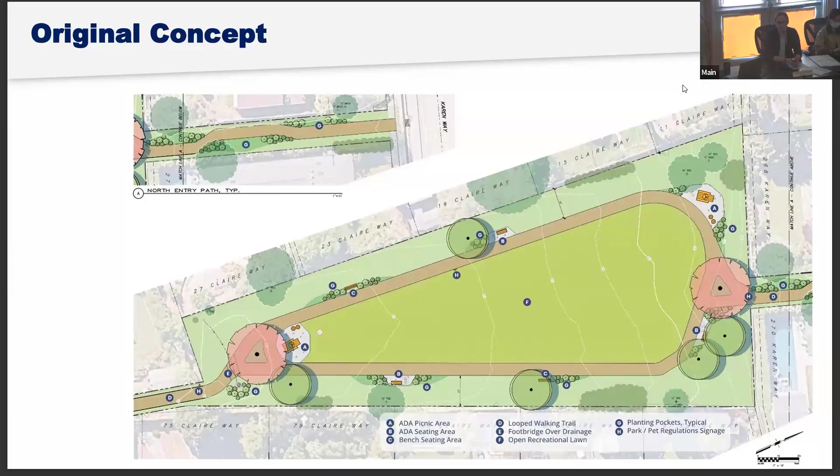The original concept.

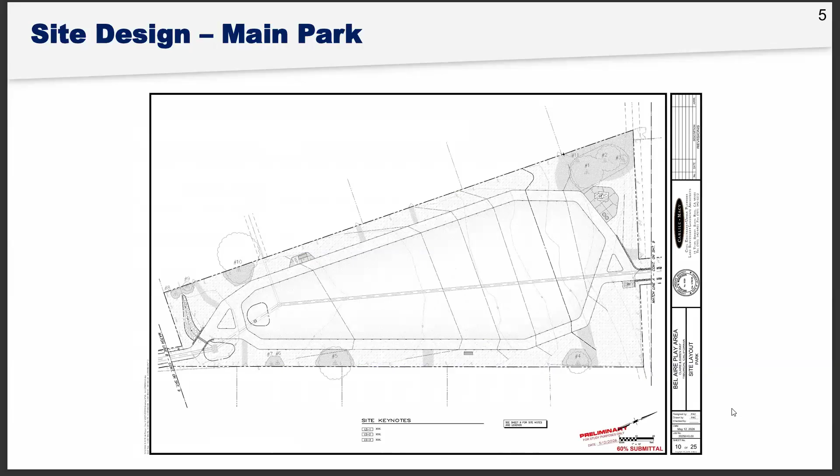Details of these are included in the construction documents. We are trying to make an accessible path, so to get grade down from Karen Way, we do have to drop the pathway in those easements, and it will require some small landscape boulder retaining walls, which is what we're currently proposing.

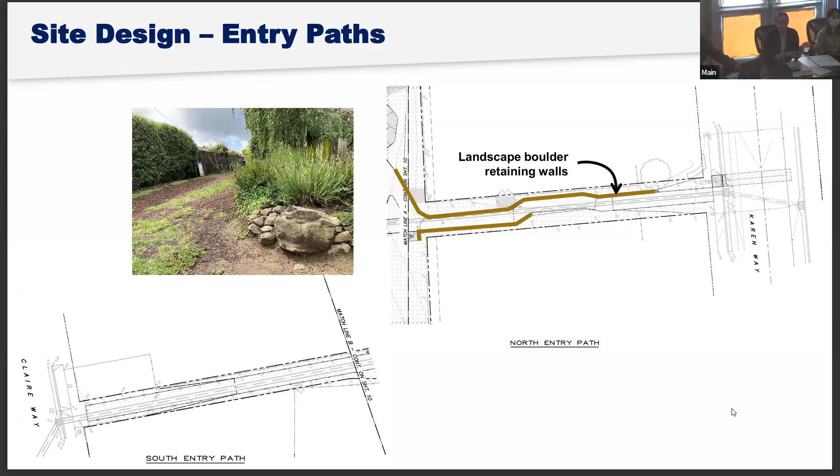This is a picture of the neighbor's property right here. So the goal is to do something very similar to help retain grade and get that pathway into the park, making this integrated with the existing neighborhood.

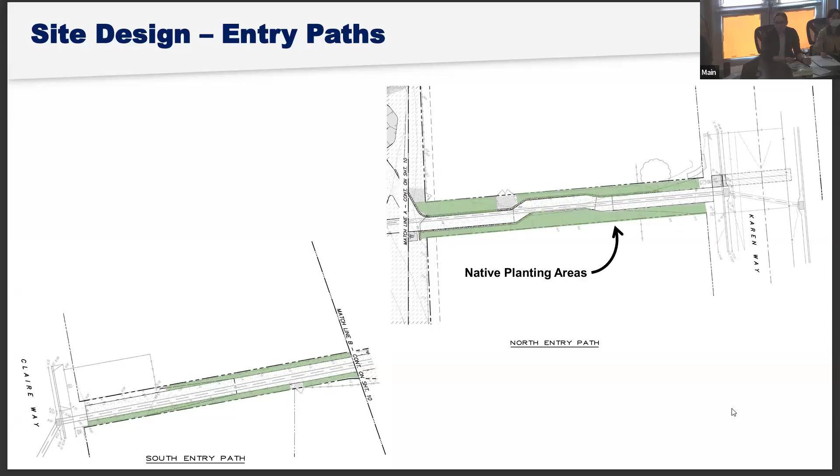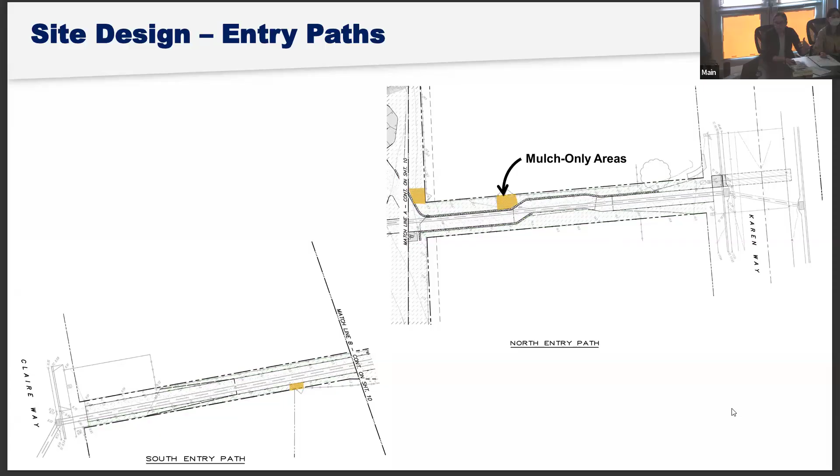There will be native planting areas on each side of the path, probably very simple since there's not a lot of space. We are proposing keeping access through all of the gates that the neighbors have along the fences, and just making those areas mulched so the neighbors can still open those gates and access the open space as they currently do.

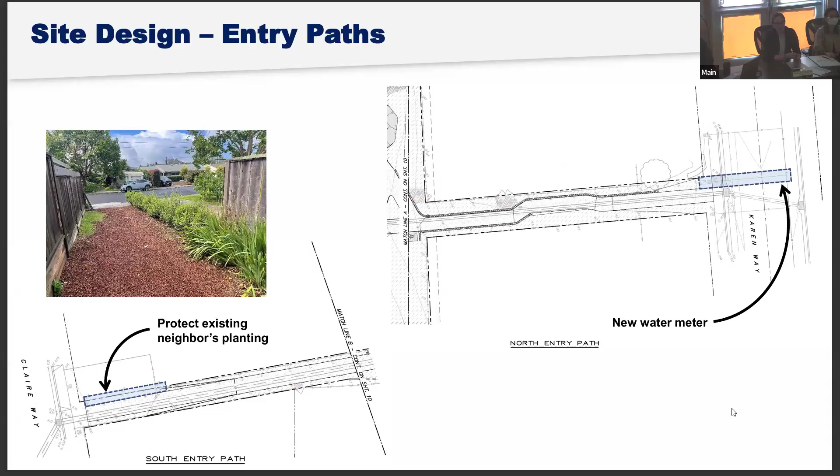We will need to put in a new water meter off of Karen Way so that we can get irrigation and water for a drinking fountain into the site. And then the neighbor on the Claire Way end has some existing vegetation that we want to make sure we can protect, or replace if it gets damaged during construction.

There we go. Within the main park, the main feature is the natural surface tenth-of-a-mile loop pathway. It includes access from the Karen Way sidewalk and the Claire Way sidewalk.

Again, we're talking about a natural surface. I'll have some examples of surfacing options here in a second. These pictures show that we had originally proposed a 15-foot planting buffer, but several neighbors said that buffer was too big and was taking away from the open space.

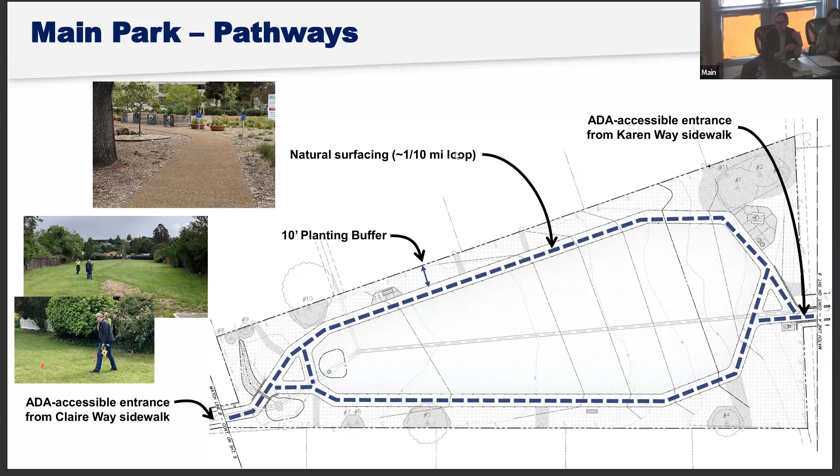So we did a site visit and flagged what a 6-foot path would look like if it was 15 feet away or 10 feet away. These pink flags are the 15-foot and the orange flags are the 10-foot. We agreed that a smaller 10-foot buffer actually created a lot more space, especially on this end, and it did not take away from providing just enough clearance to the neighbors' fences so it didn't feel like people were right on their fence.

So when it comes to pathway materials, we are hoping to get some feedback. We did hear people do not want concrete. One of the considerations we want to think about for the paving is that it needs to maintain accessibility, trying to find something that achieves that natural surface look but is also accessible, and doesn't create a huge maintenance concern for the town.

These are some of the options we're looking at. Porous pave is like a blended rubber with a binding material. It creates an entirely permeable surface; water literally flows right through it. It's durable and looks very similar to DG. Organic Lock DG is just one version of decomposed granite that incorporates a binder to make it a little bit harder, but it does require annual maintenance.

It can get moss that grows on it and make it slippery, but it is a very common material that I'm sure most people are familiar with. Infield blend is something used at baseball fields, but also on tracks like for elementary schools. It requires maintenance, but it's a more natural surface that can be compacted and made accessible as long as it's maintained.

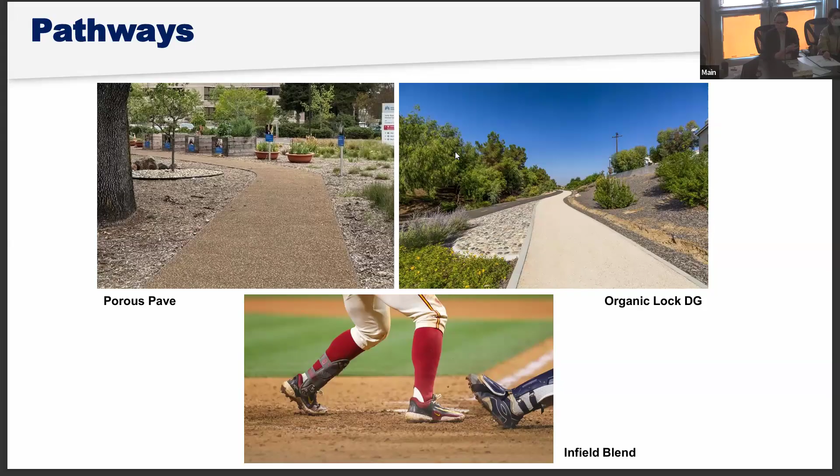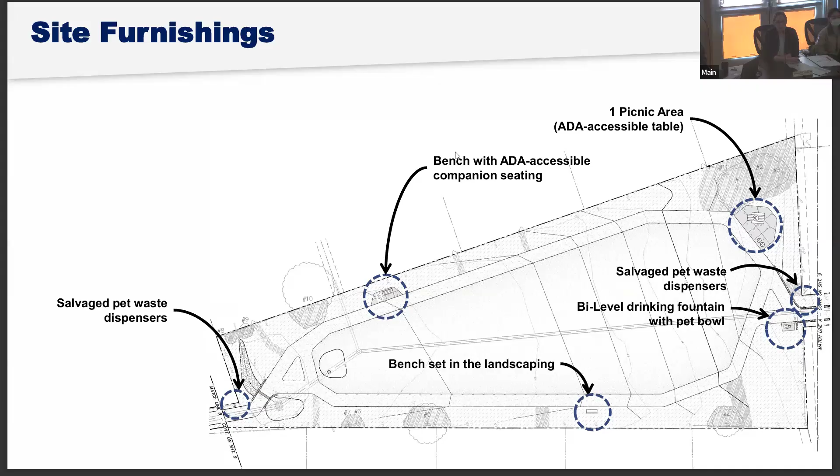The plan also includes site furnishings. As I mentioned before, we reduced the picnic tables down to one location. This is located where a neighbor already has a table and chairs. We have two benches: one is set on a pad that allows for wheelchair companion seating, and one is set in the landscape. We also have a bi-level drinking fountain with a pet bowl, which is the town standard, and we want to reuse the pet waste dispensers already located in the park.

These are the standard Tiburon furnishings provided to us by some of the staff that maintain the parks. It doesn't mean we have to use these, but we wanted people to understand what is commonly used at other parks. We do know there are other trash can options, like the BigBelly bins, that could be used.

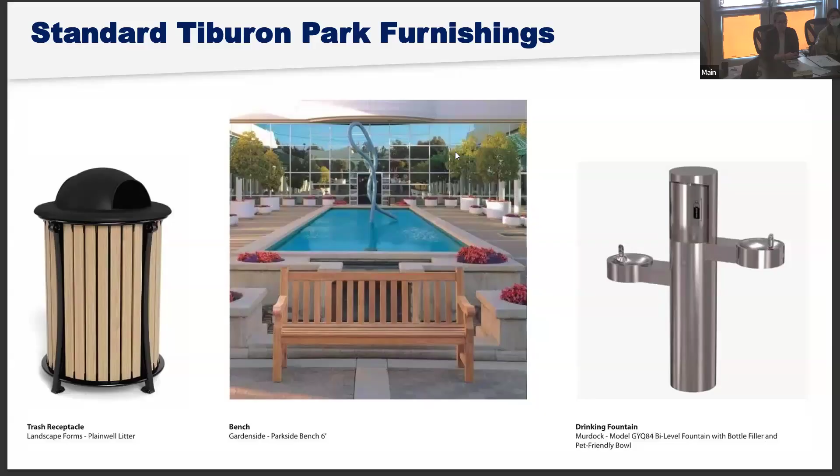For consideration, we looked at some other site furnishing materials that would be in line with the town standards but might provide a different feel. Bel Air is definitely like an extension of people's backyards, and so considering furnishings that feel that way but are still durable and relate to the town standards, we wanted to put that idea out there and hear what people think.

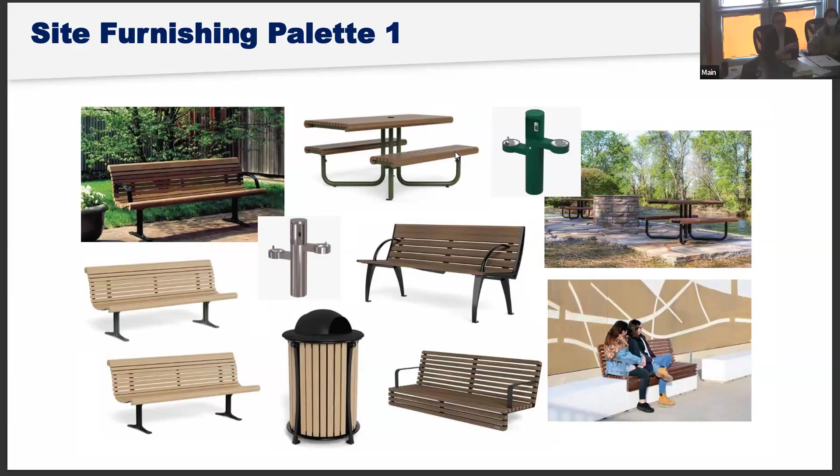So these are different versions of wood and metal benches. Something we're also showing is you can do different colors, so it might be nice to have some pops of green or something like that instead of stainless steel, which shows dog noses and fingerprints pretty easily.

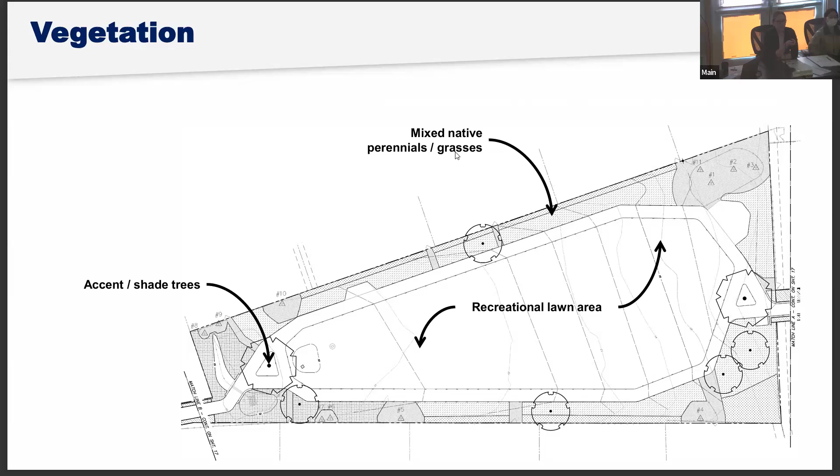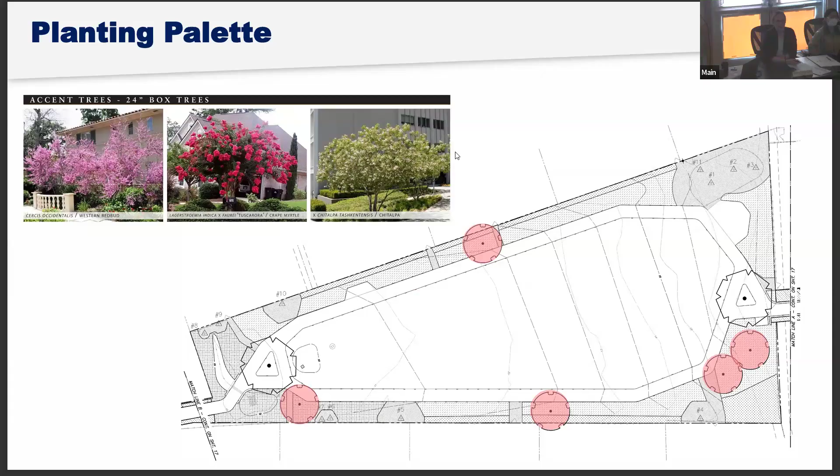When it comes to the vegetation in the park, obviously the main feature is the recreational lawn area. We are proposing some accent trees and shade trees, and around the border is mixed native perennials and grasses. I'll go quickly through these, but just showing some of the plant palettes: flowering accent trees and shade trees that would provide seasonal color. They would drop their leaves, being deciduous, in the wintertime to allow sunlight in.

The planting palettes are primarily natives. These would be sort of foundational shrubs against people's fence lines, just to provide a backdrop, and then primarily grasses and flowering natives to fill in the rest of the areas.

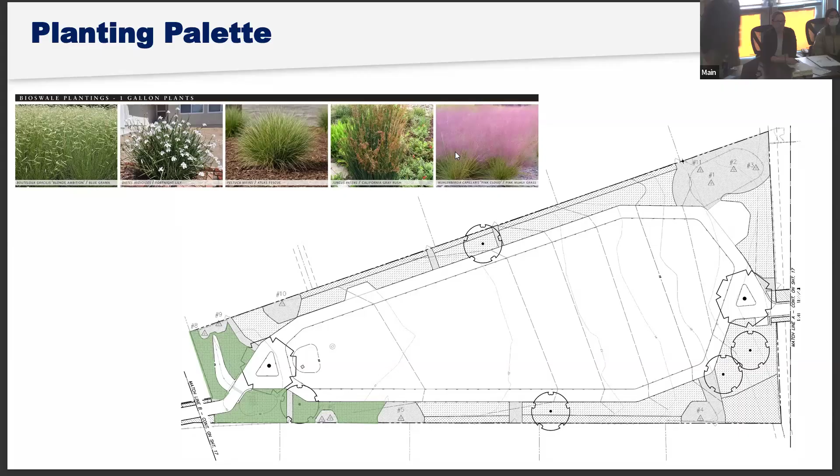This end of the park gets very, very wet. You can see these lines here are the contours, so if you imagine a drop of water falling here, it will hit these lines perpendicular. All the water is running down here, and this is kind of a low spot. There's also some drainage features from neighbors' backyards that we want to incorporate into the existing storm drain there. Whatever we plant down here, we want it to tolerate having wet feet and be able to survive and thrive even when it gets wet and soggy down there.

Along the entrances, we are going to have primarily durable grasses and some things that flower. There are some neighbors that have bulbs and things growing in there, so we're trying to keep that spirit going.

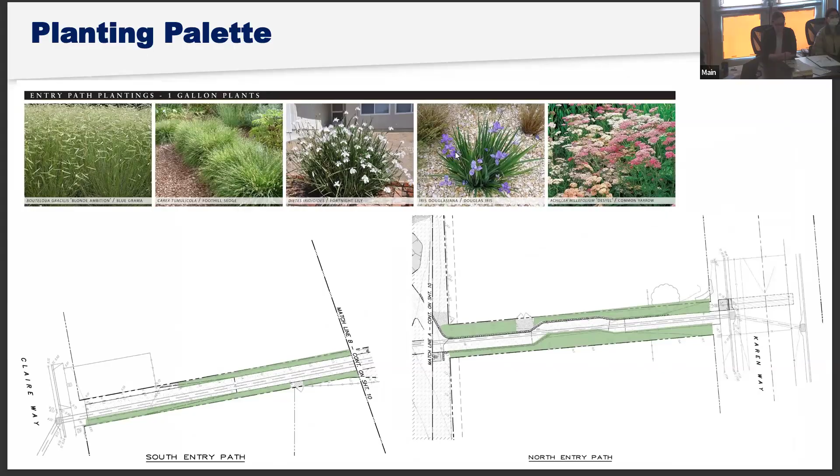One of the asks of us in our last presentation was to look at phasing. So we are proposing a couple phasing options, which I'll run through. One of the benefits of presenting this now and then modifying it before we go to town council is we can also talk about how changes to materials or value engineering can affect or lower the price. So we are open to that conversation. I just want to be clear about that.

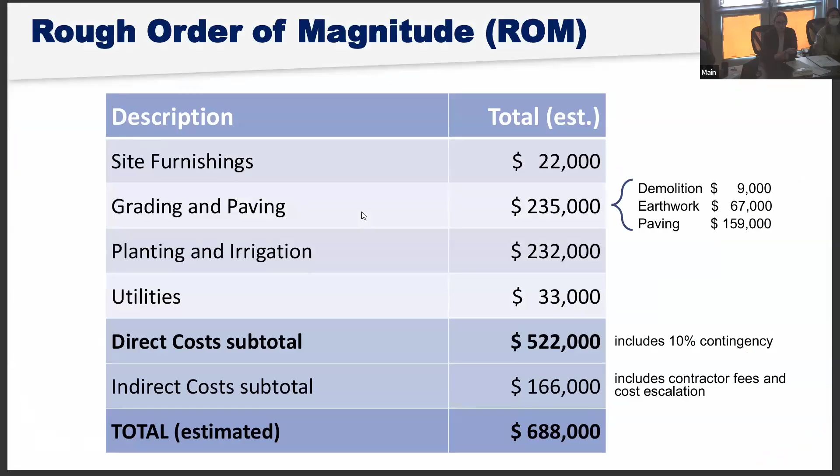For phase one, one of the biggest cost drivers is grading and paving, which we need to get in right away. The second cost driver is planting and irrigation. You can see those are the two biggest items, and paving is a big cost here. As I mentioned, porous pave is more expensive than DG, so depending on the pavement selection, that's a way we could lower that line item.

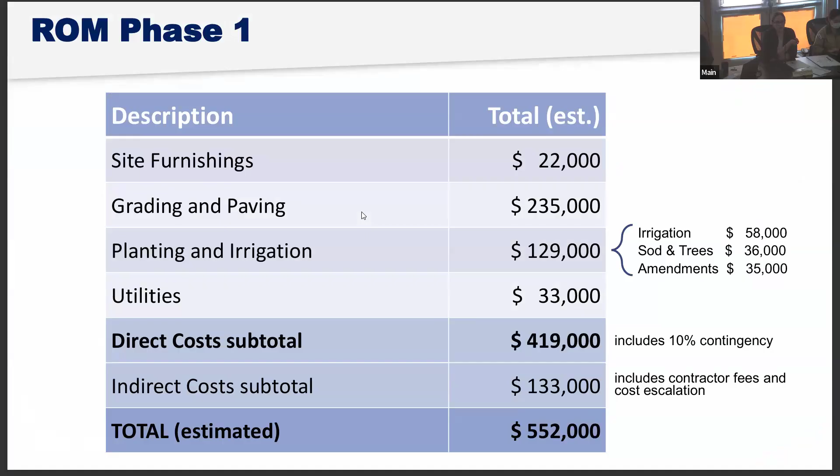When we get into phase one, we looked at how we could break out some of this cost, and planting and irrigation seems to be the area where we have the biggest impact. By reducing some of the planting and irrigation scope in phase one, we can get the direct costs to a little under 420,000, and the total to about 550,000. So this is what phase one would look like.

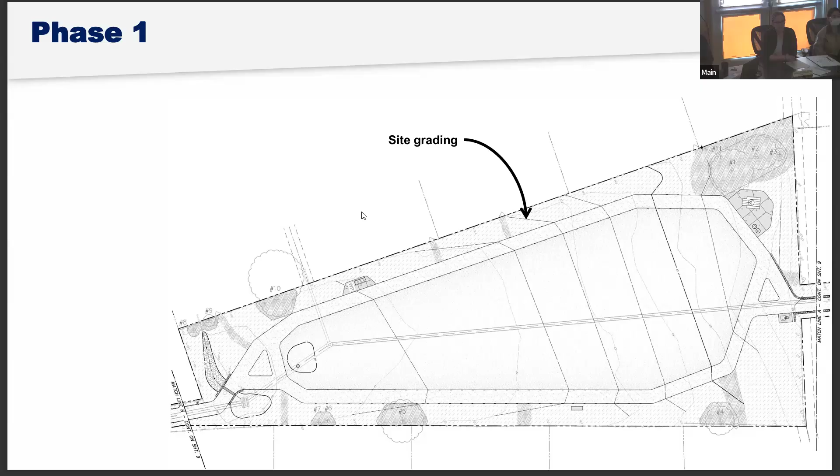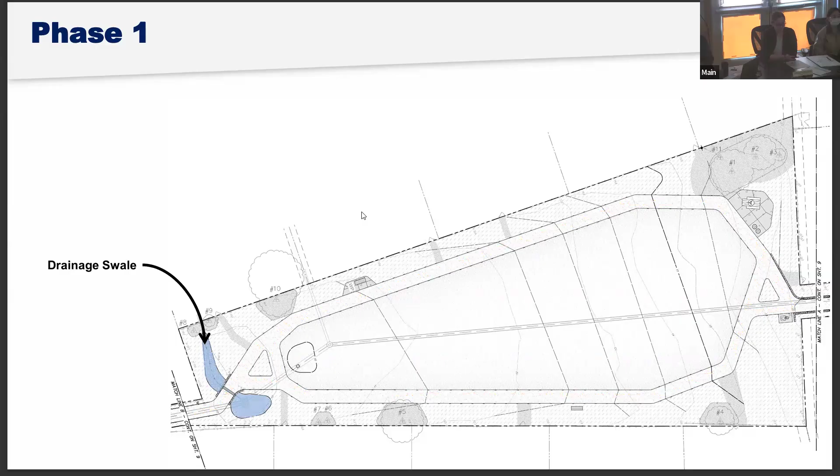That includes getting all of the site grading done, which is one of the biggest mobilization items, and getting in that natural surface accessible path. We want to make sure we include the drainage swale—it has a small culvert that goes underneath the pathway so we're addressing drainage problems. We would include the site furnishings, but this could be an area we move to phase two. And we would focus the landscape and irrigation on the lawn and the trees.

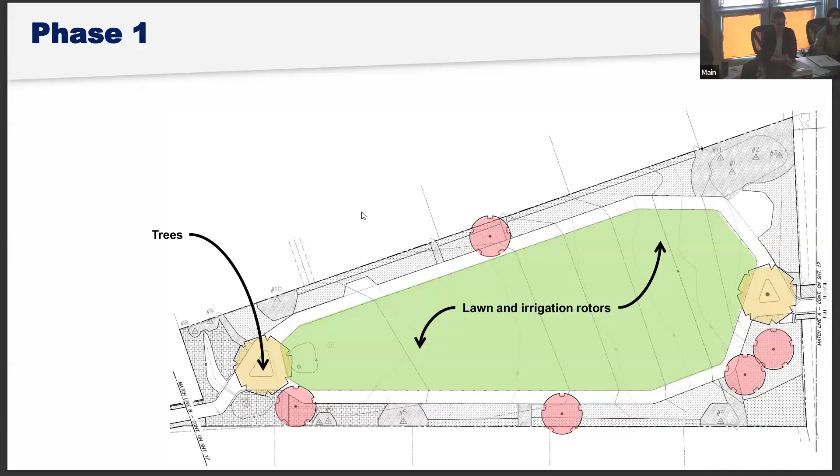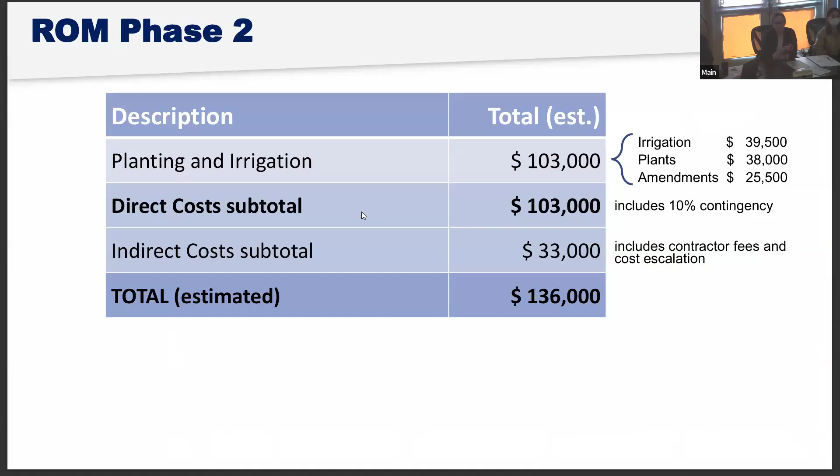Phase two would be completing the planting of those other areas between the pathway and the fence line. So this is basically just planting and irrigation and amending the soil, and that would be about 100,000, with indirect costs added, about 136,000. That covers all the understory planting, including along the entrances from Claire and Karen Way.

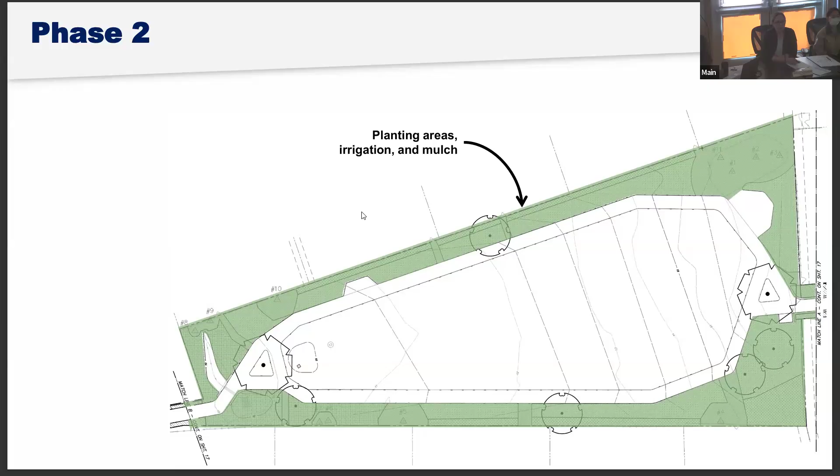To touch briefly on project timeline so everyone understands how we're moving forward: we had our first meeting in February, the second meeting with the revised concept in March, and here in May we're presenting our 60% CDs for your comment. We'll incorporate any feedback into the presentation to town council, currently proposed for June 17th, then go out to bid in July, hopefully start construction in September, and be complete by the end of the year.

I was also asked to provide a brief update on Cypress Hollow, since that's the other park we're working on. Why don't we hold off on that? We have that later in the agenda. Oh, so, okay, yeah, it was just the timeline. Yeah, so I'll hold on that and skip ahead—any questions?

Great, let's open it up to questions for the commissioners. If I may, Mr. Chair—yes, all right, thank you. Again, for the millionth time, thank you for all your work from Carlisle Macy, it's been awesome working with y'all. But as we get down to brass tacks, we definitely have some questions here. I'll ask, because my fellow commissioners know, no fear asking the dumb questions, so we'll start with those and some of the basics.

First and foremost, Micro Estimating, the company—I'm a little unfamiliar with the relationship with them. I understand what they do now, but why is it necessary for Carlisle Macy to work with a company like Micro Estimating? And the underlying question is, is that a requirement in some capacity that the town put on y'all, or is it based on your working relationships, where you tend to lean on them for these estimates?

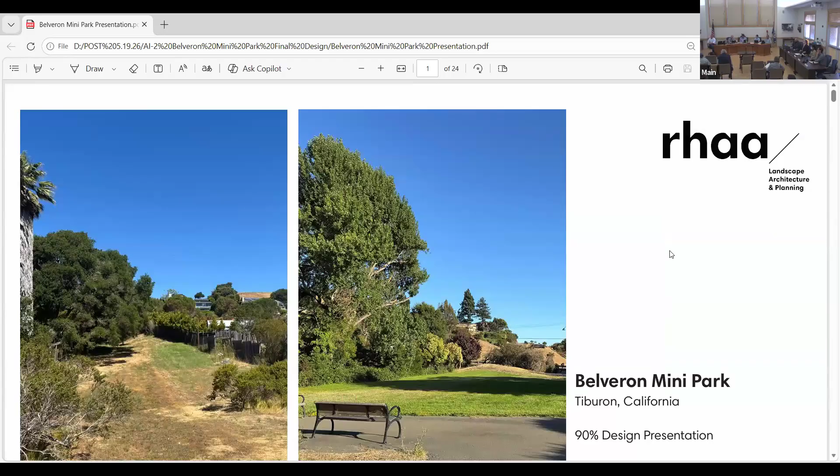All right, let's move on to action item number 2, Belveron Mini Park draft final design. Okay commissioners, we're moving on now to action item number 2, and we have Constantine Miller from RHAA and his team that will provide a presentation on the Belveron Mini Park for the commission to hear, along with any public comments. And then again, pretty much like Bel Air, try to move this forward to town council next month. Thank you. Thanks for being here.

It's just been exciting to work with these guys in kind of a forgotten play or park area that we have. And what we've given to them as direction is also to look at kind of a phasing, a phase 1 and phase 2, a more important area versus a less important area, utilizing more of the town staff and their contractors to do some of the work. So that's kind of the tee up. Thank you.

All right, great. Am I audible to everybody? Yeah, you're great, sounds good. Just wanted to say first off, thank you everybody for your time today. We're happy to be here presenting this project. This is sort of a special one, as Chuck was mentioning, this is kind of a forgotten gem. And I think it could be an amazing amenity to add to the adjacent Blackie's Pasture Park and the overall linear park that has been in planning for a long time.

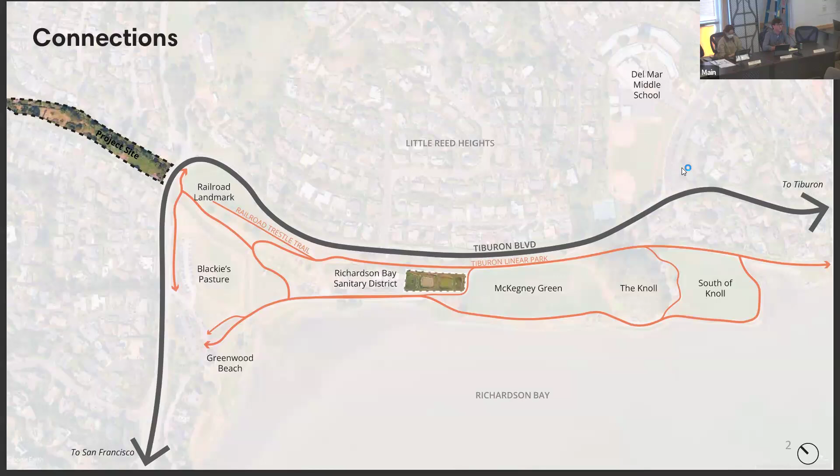Just to give you a sense for where we are, as most people have not visited this park: Tiburon Boulevard, Blackie's Pasture, and then here is this 2-acre, 80,000 square foot park space that is sandwiched between Mercury and Jefferson, and was a leftover when the two neighborhoods were created. So this park space was provided for the community.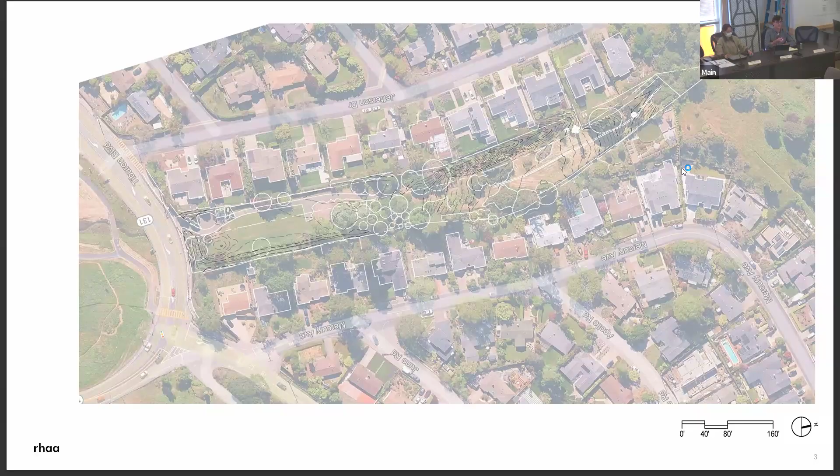Again, here we are showing that kind of sandwich between the two neighborhood developments. Long, narrow park with phase one at the bottom, which is all pretty flat. And then you start to head up the hill, and that becomes phase two.

Just to give a little snapshot of where we started and where we've come to, originally we provided a concept talking about different program opportunities and planting approaches that could really enhance this space, provide habitat, provide different unique experiences for visitors, and possibly some environmental and educational signage and things of that nature.

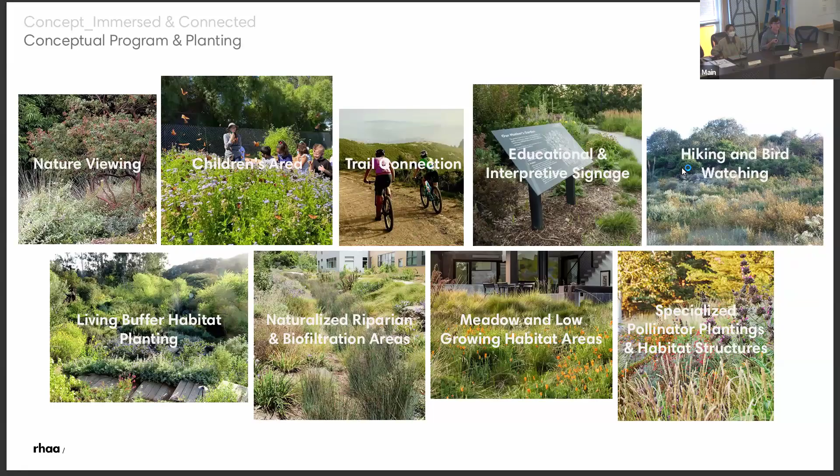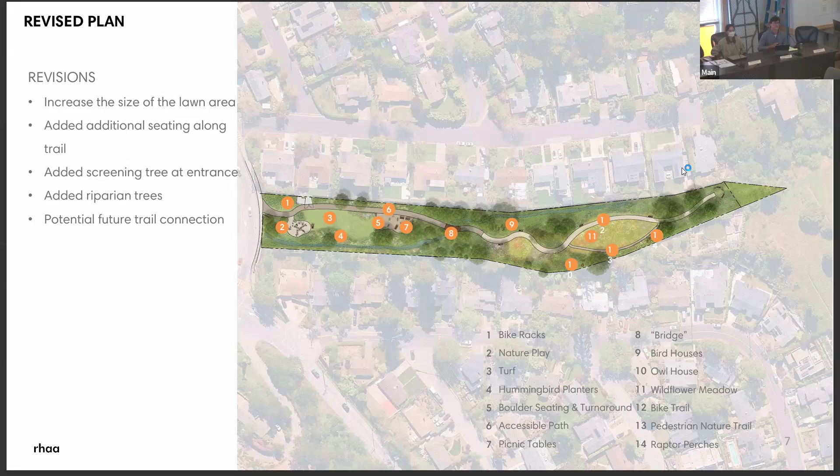We then moved along to creating a visual for how these things could lay out on site and what those different nodes along the pathway, as you move through the park, could be. That was then vetted through the community as we moved forward and provided a little more detailed plan with those different elements laid out.

We received some really great feedback. I think everybody was in very strong support of this proposal, that they would love to visit this park if these new recreational features were added. People love the lower lawn space, it gives them a place to hang out, kids' birthday parties, and things of that nature. They also really like the idea of the picnic area opportunity as well as nature play for kids.

So those were things that we definitely wanted to keep in the design and are still in the design. As you can see, the interpretive signage was not the biggest hit with the community, so we have not moved forward with that in an effort to keep costs reasonable.

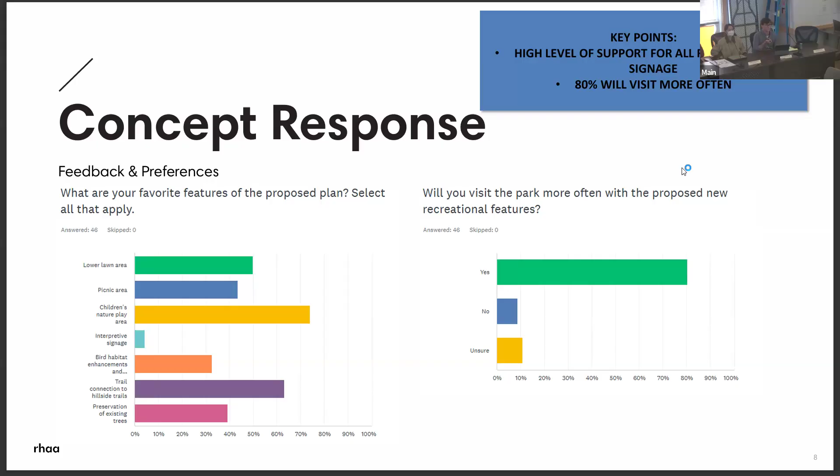I'll jump on from there. So now we're moving into our 90% design. Those are the drawings that we have provided to the commission, to David and his team, to look at, and that our current cost estimate is based upon.

So here again, we have that same view you were looking at previously, but with those site components laid out, and some of those elements were no longer included after we didn't get much public feedback. So just to run you through what we've got here.

So in phase one, which is the lower half of the park, we have bike parking next to the picnic area. We have a nature play area with an interesting log element for kids to mess around on. We have benches, currently 1, 2, and 3, for people to enjoy that green area and the enhanced planting and watch their kids play. We have a picnic area with 3 different tables, ADA accessible and standard.

We have a walking path that runs all the way through the site and all the way up to the top where you get those really cool views by the Heritage Oak. We also included right here a boardwalk crossing that takes you over what's often a seasonally wet area when it rains, that makes the upper half of the park kind of unreachable at certain points in time. This entire path section is ADA accessible and will allow anybody to get across that crossing and experience the grove.

It should also be noted that we're planning on putting a new entry sign here and a water fountain, bottle filler, and dog bowl as well. We're trying to make this a place that people want to come and want to spend a little time, and hopefully it's nice enough with enough amenity that you can stay for a bit.

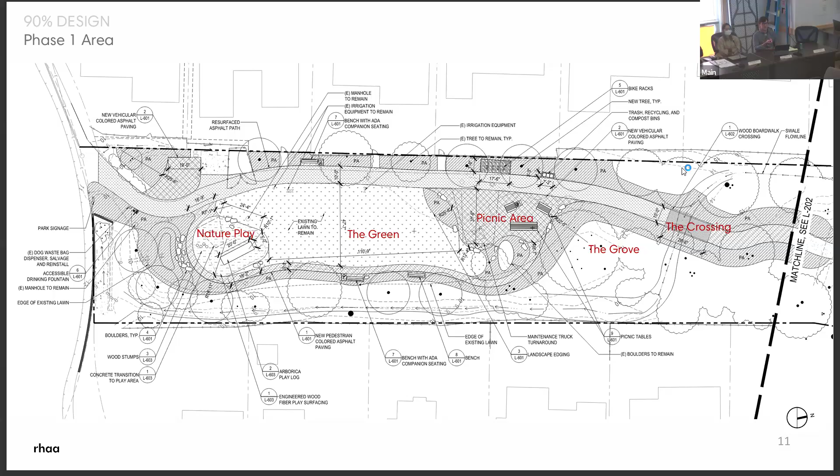This asphalt path here, and I'm going to get into this a little more in a diagram in a moment, is a resurfaced path. There's an existing path there - that's a cost mitigation approach to reuse that path and resurface it. And then that leads to a new boardwalk crossing by which folks can get across that wet area and access the upper part of the park.

So this is that diagram I was referring to, and I think this is helpful for anybody who has been to the park previously, but if you haven't, I will describe. The orange here is the existing area to be resurfaced - that's an existing asphalt path right now, used for anybody accessing the park, and also used for maintenance vehicles. We will be resurfacing that.

We're going to be adding some new paving in the red areas that you can see, and that's going to be asphalt. Currently within our proposal, we have a colored asphalt so that we could potentially make it look a little bit more exciting, and we can talk about that further when we get to the estimate.

This is supposed to look more green - it's not really showing up very green in the center here, but this is the existing lawn area. We have decreased its size a bit; the existing size is the green dash. So we've tightened it up a little bit and then added that planting and amenity spaces in on the edges.

I should note that there are three new benches and three new picnic tables.

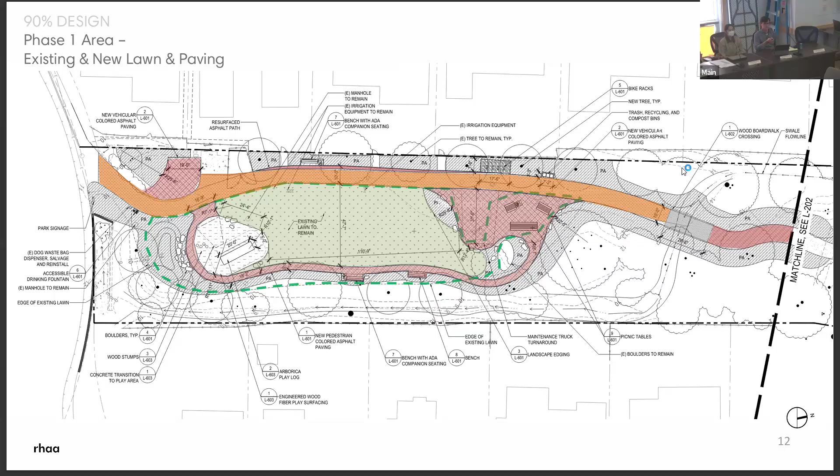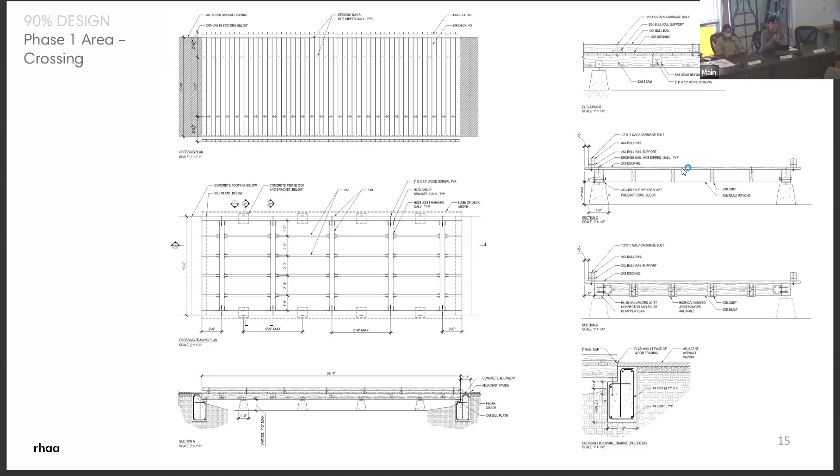So we're primarily using native plants, things that bring in pollinators, which ties into our original concept to make this lower area by the green extremely pollinator friendly, and also to get all the butterflies and the bees.

As you move back to where that crossing is, it gets more wet and is surrounded by willow trees, buckeyes, and some other varieties of trees. The idea is that we can shift into some more wet, riparian species that will hopefully draw in more of the songbirds, because songbirds love that dense, thickety sort of ecology.

Shifting to the upper area, this is phase 2. As you come up the path and gain elevation, you can see we're crossing all of these contour lines. We're coming up this steep bit through the grove of trees, where we have planted 4 new buckeyes and 1 new black oak.

You then come up through the chaparral, which is a lower growing plant type ecology, primarily natives. We'd be looking to do a little bit of planting to support that experience as you enter the meadow area. The meadow area has a 6-foot wide path and a 4-foot wide path.

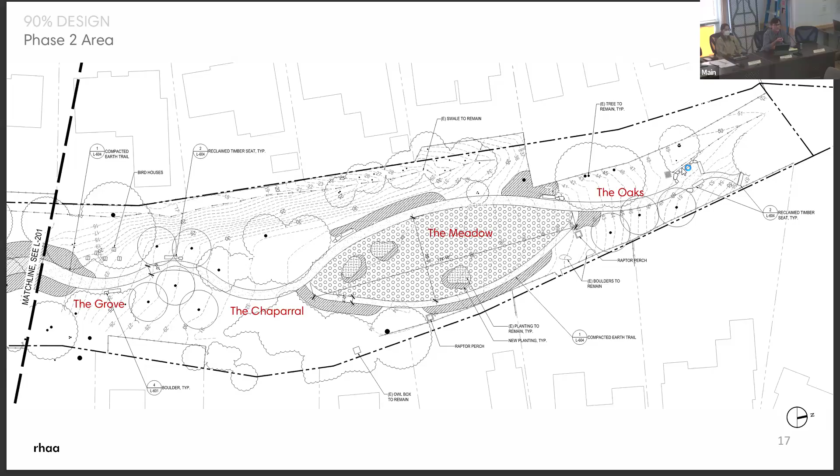So looking at some of the site elements, reclaimed timber benches, we can do these in a lot of different versions. They can sit completely on the ground, as shown here on the right, and have the top cut. We could put them on top of other logs like on the left. But what we're thinking right now is that you cut the bottom of the log to fit a little bit of the grade, and then you get an interesting place to sit.

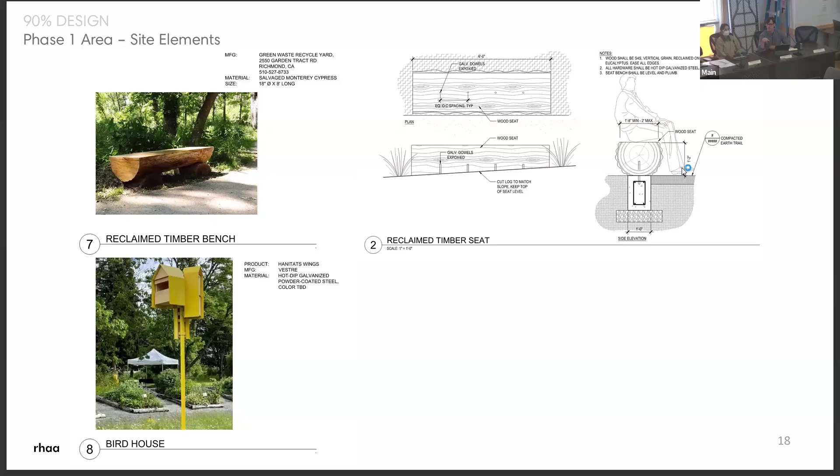We also got these priced, which are sort of like modern, interesting, poppy birdhouses. I am not happy with the price that came in on these, and we'll have a chat about that in a few moments.

So now jumping from the fun stuff into the cost estimates, which is also fun. This is our original cost estimate from March. So this is no longer current, but I wanted it in here so we can all see where we started and where we are now.

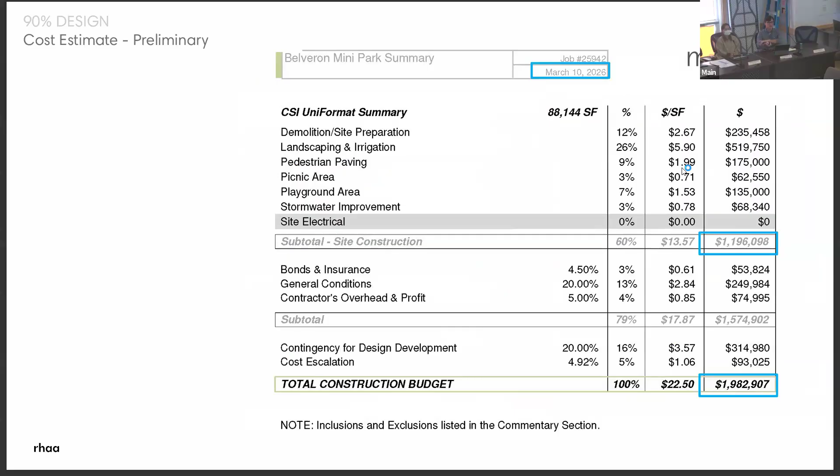Oops, pardon me. So our site construction subtotal previously was almost just shy of 1.2. With everything included, just shy of 2 million. We were told that that is too high of a cost, and we agree. So we definitely tried to tighten that up, and we did to a degree.

So what we're looking at here is a 20% reduction in cost from March 10 to May 15. Base costs, $151,000 reduction, and then all in almost 360, 370. So that represents about a 20% reduction.

And that was primarily achieved through tightening up our square footages on what we're doing out there, and also a reduction in the contingency for the design development and the cost escalation, because as we talked about a little bit ago, as we proceed closer to a final design, that contingency drops from 20 to 10%, which is that reduction you're seeing there. And then the cost escalation also decreases as we get closer to the project construction date.

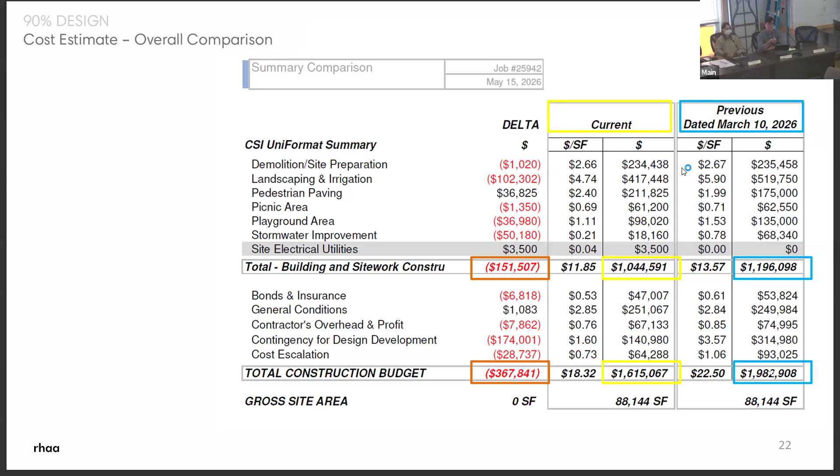Moving forward from that to a little bit of a breakdown, what we're looking at now is that for phase one, which is that lower area, our total site construction is about 750, and the total budget all in is about 1.1. Phase two makes up the difference, shy of 500.

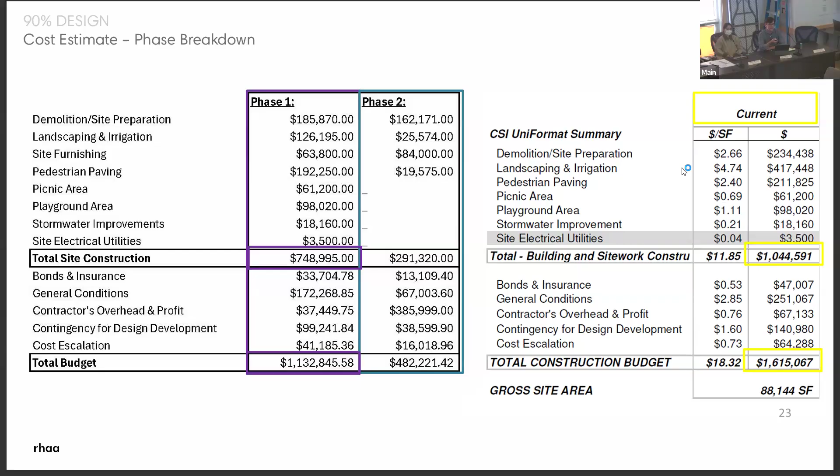So what I would like to do now is jump back, if I can, and we can always jump back to anything. Just jump back to our plan here, which is, I think, fairly easy to digest. And I would like to talk through what I've identified so far as, and maybe I should hold this discussion. You guys can let me know what you think. But we've already kind of penned out another 20% reduction that I'd like to describe. So that would be my next discussion. But if we would like to talk about anything else first, I'll open up the floor.

I think talking about your other identified 20% reduction would be a good step, because I think that would be many of our first questions.

Okay, great. So what I've identified here is about a 260,000 reduction off the total. And then we also know that that design contingency is going to go from 10% to 5% as we move into our next cost estimate prior to city council. So that equals about $330,000, which is about 20% of our new total. And I apologize for any bad math.

So as far as what those cost reductions look like, in phase one, currently our Arborica wood element, which is that big nature play piece, is very expensive. It came in at about $75,000. So I think what we should keep in mind is that that's the fabrication of it - taking a raw piece of wood and turning it into a nice, smooth, beautiful thing that kids want to play on. It is the engineering of the footing and the connection to the footing so that it doesn't roll over on anybody and it sits there in a beautiful way. And then it's also the getting it to the site and having it placed.

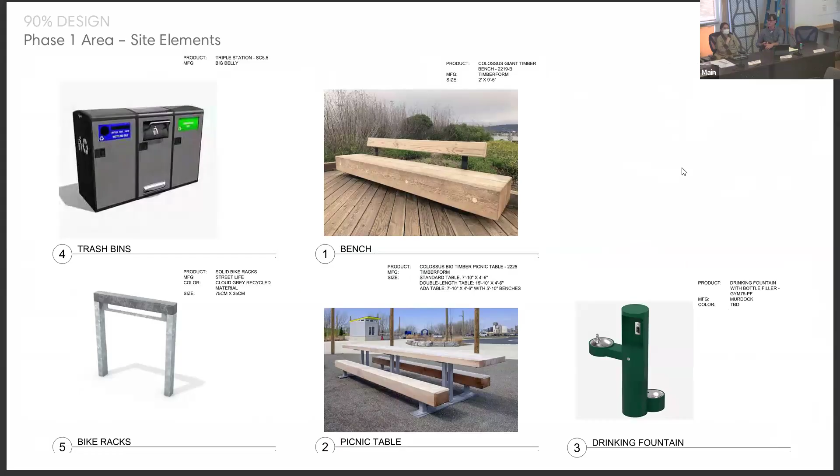I think play elements that are also artistic and potentially represent sculpture within the landscape could also be really cool as far as donor opportunities go. So that is kind of my pitch for donor opportunities, and I guess at this juncture I'll turn it back to y'all to give us some direction here.

Our next step is 100% design with city council next month, and we're planning to use any and all of that time prior to getting these numbers where y'all want them to be. Great, thank you. I'll open that up to questions from the commissioners.

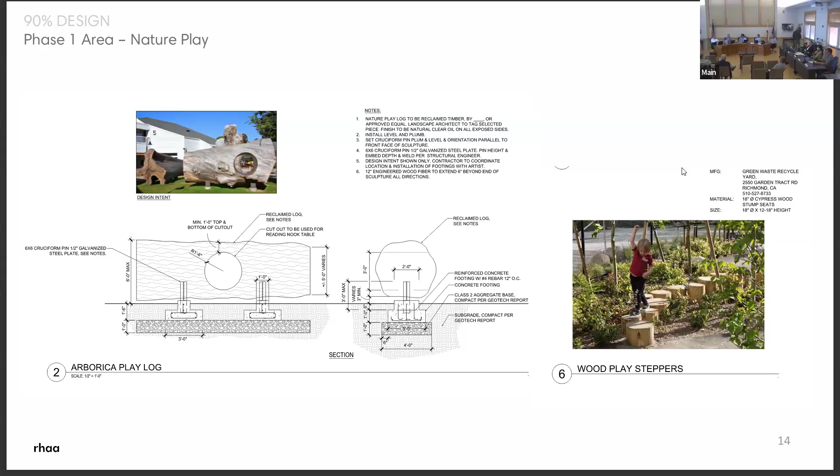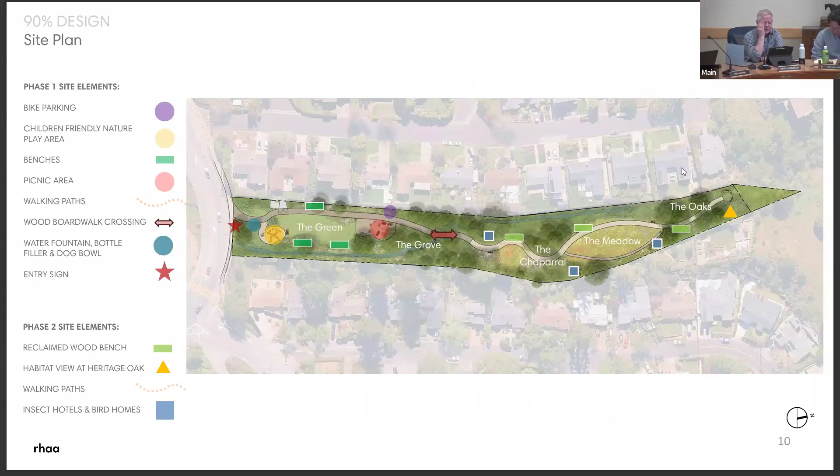Thanks, Kosin. Again, I think it's a beautiful area and it's wonderful in areas. A couple questions: when we were out there a few weeks ago, maybe three weeks ago, on that mound, you had talked about putting a slide into it. And now the slide's gone and now it's the $75,000 log. Could you help me understand what happened there?

Yeah, certainly. So we had always had the nature play area in the design. The slide was an idea about using that mound, but slides have to be accessible to everybody, and getting accessibility to the top of the mound sort of rendered the mound itself no longer just a simple move. So instead we put boulders on that side so kids could have a clamber area, and we made sure the nature play area is fully accessible. It has engineered wood fiber, and it also has to have a concrete ramp that goes down below to make sure folks, regardless of how much that level subsides with the engineered wood fiber, can get down to it. Okay, thank you.

Do you have any questions? There was one key feature in the upper area that I was surprised you didn't flag. If you want to enlighten the rest of the commission on what we found up there a few weeks ago, you know what I'm talking about.

Are we talking about the bike jumps? Oh yeah, we are. So we were up there, and it's very clear that some of the neighborhood kids enjoy that space as a spot to go up and test out their skills. We found a couple homemade bike jumps up there, and their gardening and landscaping implements to keep it all clean. They had a little track kind of laid out. So clearly it's a place the neighborhood kids are already using, and it's kind of exciting to think they might be able to use it further.

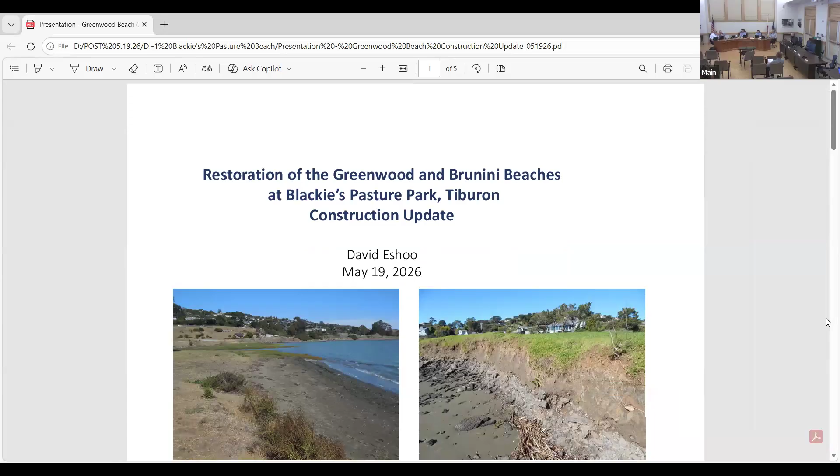Okay, commissioners, members of the public, quick update here on the Blackie's Pasture Beach Restoration Project. Let me adjust this, there we go. So here we have just some existing photos of what the beach and the erosion looks like currently. There's about 4 feet of bank erosion, asphalt along the shoreline, crumbled asphalt that's been out there for decades, and the erosion now is exposing more and more of it.

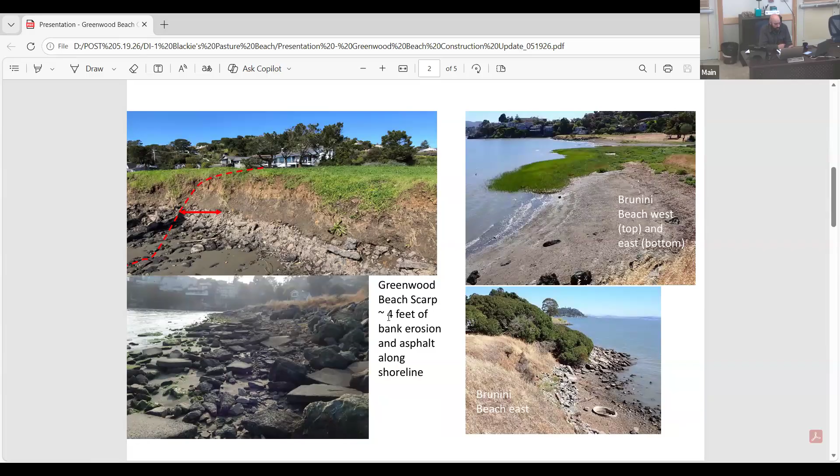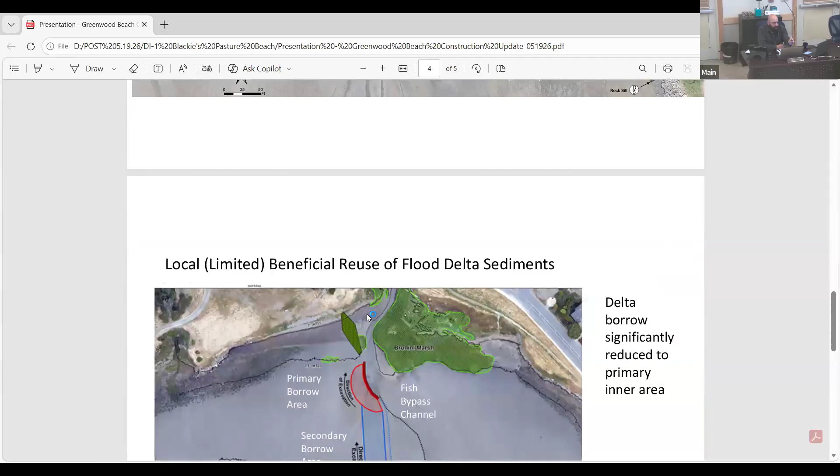Go to the next slide. This next slide represents the beneficial reuse of the sediments - this is the delta borrowing area. I'd like to let the public know that originally we were permitted to borrow, not remove, material from one location to another - 925 cubic yards. We've heard a lot of folks come in and ask us to try to reduce this. So based on what Roger Leventhal and his team have done, they've reduced this borrow area from 925 cubic yards down to 140 cubic yards - a lot of reduction - and they've secured material to fully cover that difference, that delta. They're still looking for additional material to try to reduce that 140 cubic yards even more. Just visually, if you'd like to know what 140 cubic yards looks like, it's basically the size of a full tennis court, 6 inches deep.

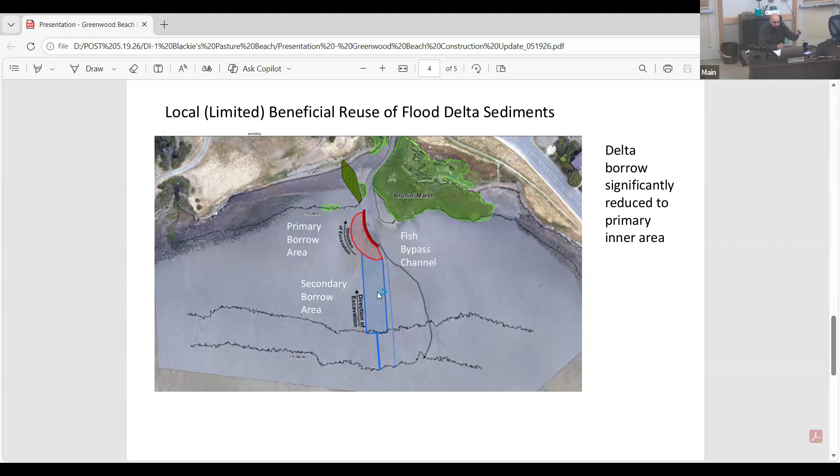That's the material, 140 cubic yards, 6-inch thick mulch on a full-size tennis court. That's kind of the borrow area. The borrow area on this diagram is where we're going to get it. The 140 yards is this red area, and this blue area is the full 925 cubic yards. This red area here is where we're getting it. This is the secondary if needed, but we already secured enough material not to borrow from there.

Here is the timeline for this project. We are planning to go out to bid May 21st, this Thursday. We're going to have a mandatory bid walk on June 3rd with potential contractors that want to bid on this project. Cutoff for questions to the design team is June 11th. Bids are due June 18th. We will go to town council on August 5th to award the project, and they'll start work immediately in September and be done by late October. We'll have a ribbon cutting with the whole project completed right around that time.

Again, we want to thank our grant funders, the MCF, SCC, SFBRA. This project's design, monitoring, and construction is 100% fully funded with grant money, over $1.5 million here, not a penny from the town to make this project happen. The main thing I want to let the public know is it's a beach restoration, but really an erosion and sea level rise issue that we're taking care of. It's to stop further erosion there and make that place much more pleasant, removing unwanted asphalt that's been there for over 40, 50 years, and just making that place nice. Roger Leventhal's team worked very closely with our Parks Master Plan team, WRT, to make sure we incorporate the master plan amenities outlined in the plan with this beach restoration project.

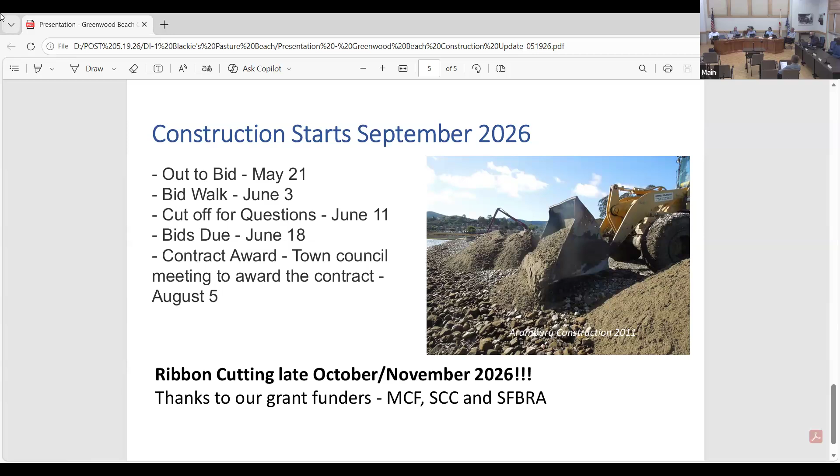And then it's clear on here, so it's both sides, including the West Brunini and East Brunini Beach also. Yes, so the work will happen on both sides as shown here. Exciting.

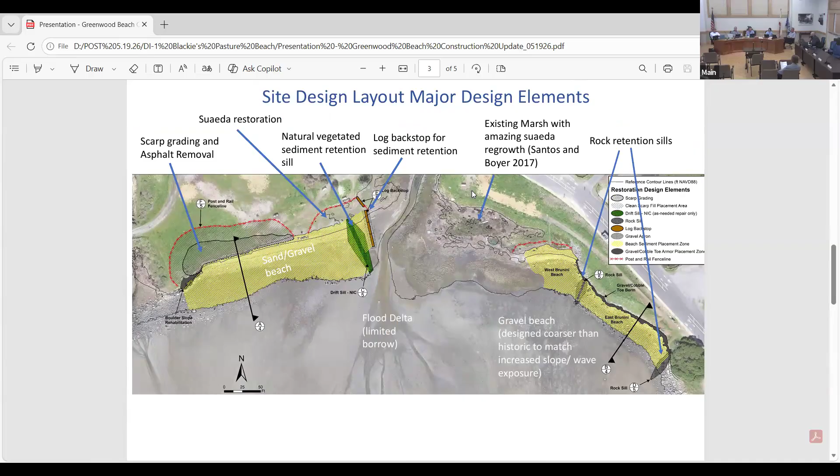David, there were some public comments from certain citizens that had very detailed questions about the project. I'm wondering if you had a chance to go through those and if there's anything you strongly disagreed with or thought maybe. Yeah, there was only one late email that came in, and much of these questions were in regards to the materials, since we've secured a lot of this material already. One of the questions was, can we stage some of this material if we get it ahead of time? And we can use Blackie's Pasture as a staging area because it's for the park itself. So we have the back end, the gravel parking area, as a staging area for materials. If we get anything sooner than construction starts and get a good deal on it, we'll be storing it out there.

One other question was about temporary fencing in this area where the red dashed line is shown. It's just temporary fencing, but it's the same split rail fencing that we use around McKegney Green and Blackie's Pasture, to make it look nice and common so it doesn't look different. This is just to protect the succulents they're planting there, the saltwater succulents, to make sure they take, and then that fence will be removed. One of the questions was, can we just use posts with a chain in between? We already have a design for that too. So if town council says we don't like the split rail fencing, put in a post with a chain between them, we can go that route as well, but we figured let's keep it uniform with the split rail fencing out there.

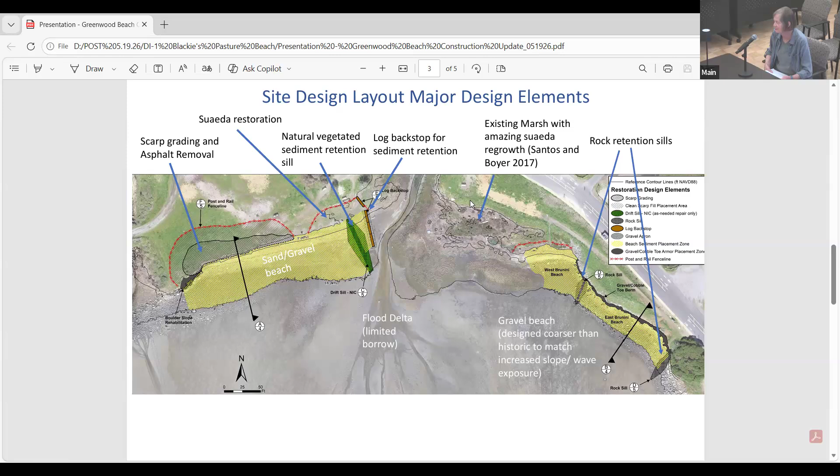Other than that, I feel really positive about this. I think people will probably ask what you're doing down there, and you'll get some of that. But overall, this is really a positive thing to take on, not just for our community but for other communities that can learn from this. So, how did I do on my timing? Oh good, wasn't paying attention. That's my comment. Thank you, thanks guys.

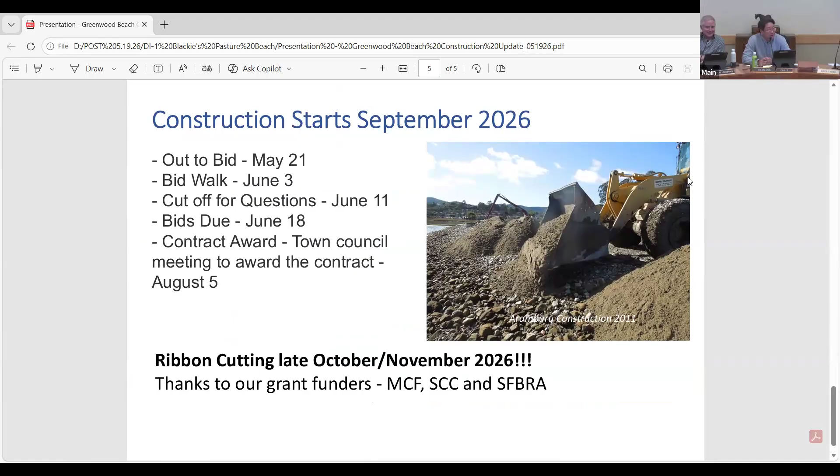Any other public comments? None online? Okay, great. So this was a discussion item, there's not really a motion to be done, but thank you for the update. Why don't we move back to the subcommittee action item, action item 3, post commission subcommittee appointments.

I think the goal here was to go through each of our subcommittees in terms of where they stood, just a high level update, not talking too much about it. The goal is deciding whether we still need each subcommittee, whether we can shut it down, and if there are vacancies on an existing subcommittee we want to keep, who should fill it. Also, are there any new subcommittees we might want to add? That's the discussion we want to have today.

Why don't we move to the first one, the Tiburon Mini Parks Improvement Subcommittee. There are still active things going on there, so I'm assuming we just want to keep it as is, unless you guys disagree. Looking forward to a future wind down.

All right, the second one, Blackie's Pasture, that one's very much active too. We do have a vacancy, so we need a nomination for someone to potentially fill that seat. I nominate Nicole Voss. Do we have a second? Second. Okay, all in favor? Yes. I accept. Okay, great, so we filled that position.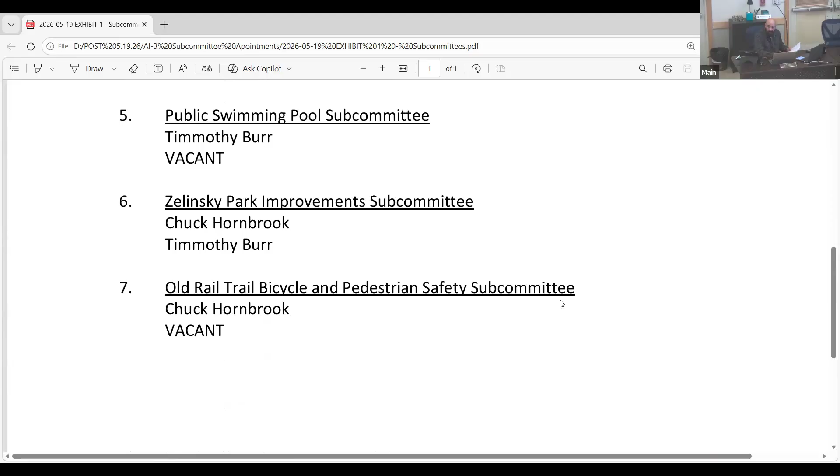I have no public comment online. So as far as the committees go: the Tiburon Mini Parks is staying the same with Commissioner Hornbrook and Commissioner Burr. Blackie's Pasture is Chair Moon and Commissioner Ross. The pickleball courts will stay the same with Commissioner Moon and Commissioner Hornbrook. For the kayak launch, we have Commissioner Khan and Commissioner Moon. We are sunsetting the public swimming pool subcommittee, and we are sunsetting the Zelinsky Park Improvement Subcommittee until, if we need to bring that back, we will. The Old Rail Trail and Pedestrian Safety Subcommittee has Commissioner Hornbrook and Commissioner Khan, and we're forming a new subcommittee, the Tiburon Capital Parks Fund Subcommittee, with Commissioner Voss and Commissioner Hornbrook.